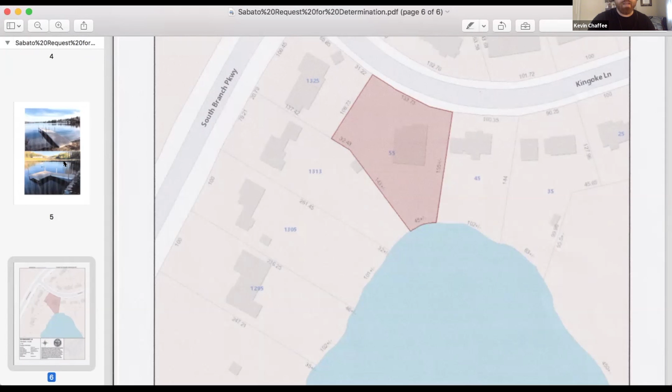Ms. Sabato doesn't have an exact dock set just yet, but she shared an example of what she was looking to do. So this is not hers, but the type that she would like, one that can be modified as such. So what I wanted to do is just open the hearing, because we have to continue regardless, but see if

there was any questions or concerns, information that the commission would like between now and the next meeting. Just if she can get us the drawing, more of a schematic for the one she's buying, I think that'd be helpful for us. Okay. I've seen a number of them. Some of them just have feet. Actually, I saw one the other day that just has a set of trailer wheels. You just back it in and then you pull it out at the end of the season. Okay.

Yep. She lives on, is that Bass Pond there? Yeah, so that's a great pond. Now does she have to get another permit, a state permit? Is Bass Pond a great pond? It's considered a great pond because people can fish in it and they can cut across your lawn. I remember that coming up when we were permitting the weed control. That's how we found out it was a great pond. Yeah, because people. Okay, well I will confirm that.

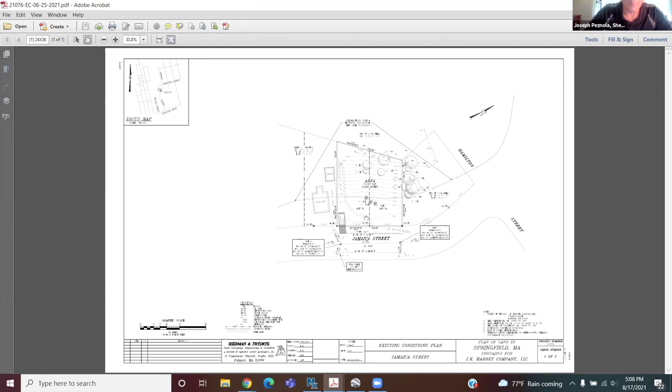So this is lots 72 and 73 Jamaica Street in Springfield. It's currently a vacant lot, 11,000 square feet, and it has a bordering vegetated wetland that runs across the back of the property. The property has only 100 feet of frontage and an average width of 110, so the entirety of the lot is within the buffer zone of the BVW.

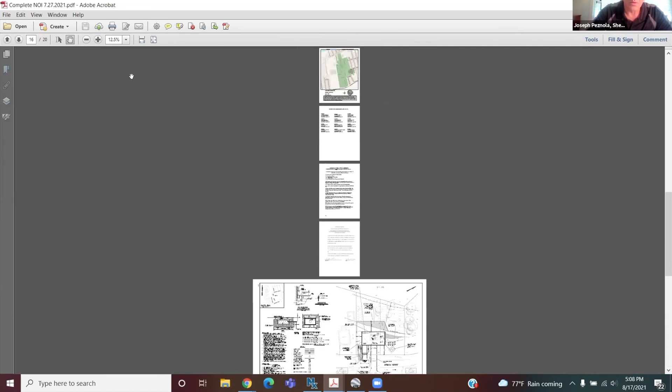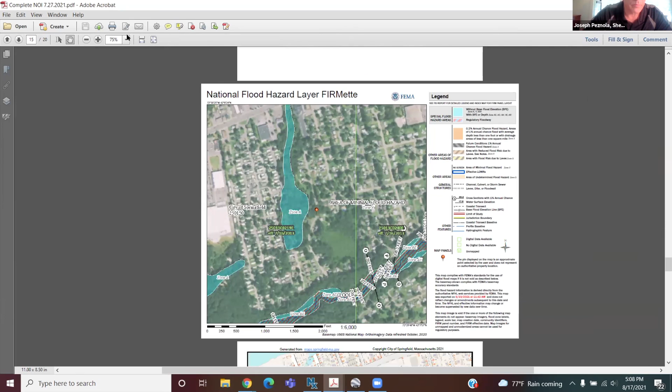We also have a floodplain bordering land subject to flooding. That is an unelevated floodplain. I can bring up the floodplain map. So it is an unelevated floodplain, a tributary to Loon Pond.

Jamaica Street is here, a little curve in it. We're right here, and there's this flood zone here that's again unelevated. When we did our survey, we graphically put it on from the floodplain FEMA maps, and it runs between the 215 and 216 contour, so we conservatively called it 216.

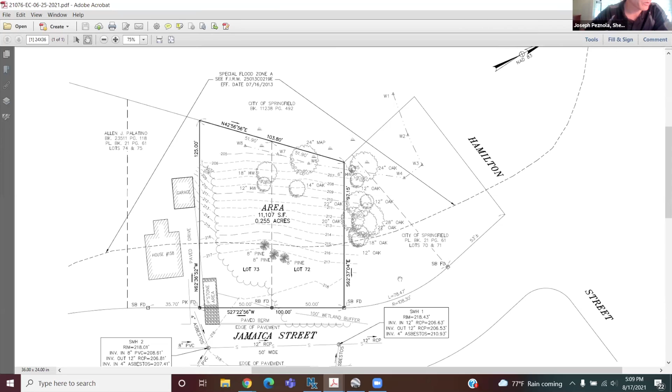There is a procedure within the FEMA guidance from the National Flood Insurance Program for approximating zone A's, and it essentially says if the graphical representation lands between contours, then you go a half a contour elevation up, so it's 216. Just to put this in context, the bottom of slope is at 205.

The expansive floodplain here from here to here is generally elevation 200 to 205, and it's 260 feet wide. So it's really, I think, a conservative call to say that we're up at 216.

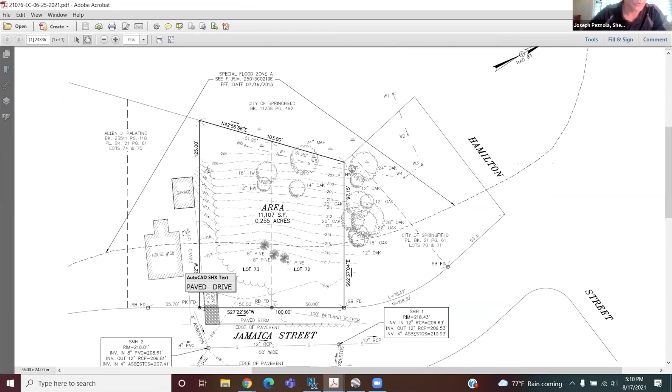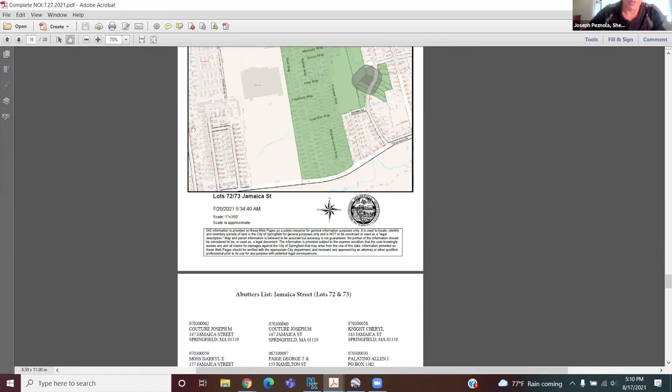For discussion purposes, the house next door has been in there since 1923. The back of the garage is at 211, front of the garage is at 214, and the house is around 216 to 217. So we think we're being quite conservative just for the purposes of establishing a BLSF without having to go through a complicated hydraulic study for the watershed, considering this is just a single family house.

So the project is a proposed single family house on the lot. We have the 50-foot wetland buffer, which in your local wetland regulations is a no-disturb zone, and we are placing the house outside of that no-disturb area. We're taking advantage of a zoning ordinance provision which allows us to put the house closer than the 25-foot setback to the street by matching the setback of the adjoining properties. So we're setting the house at 19 feet off of the street line, 11 feet off of the sideline.

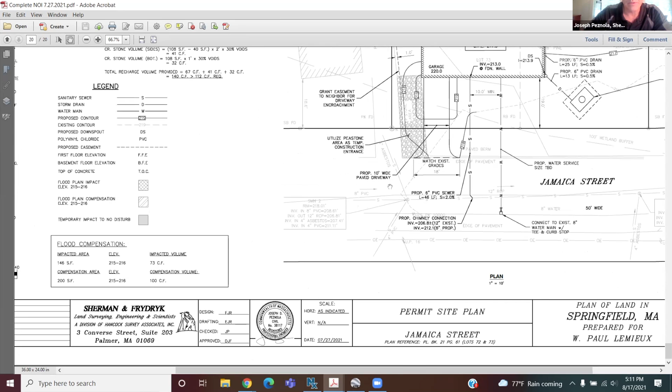We do have this floodplain impact, which is 146 square feet, 73 cubic feet from 215 to 216. We are compensating over here by cutting out the area and developing 100 cubic feet of compensatory storage for that floodplain impact.

So what we're doing inside the 50-foot buffer is we're not doing any grading. We're setting the foundation down with a walkout basement at 217, so above that 216 floodplain elevation.

We have located all of the mature trees above a 6-inch diameter DBH, and there are no trees over 6 inches in this area, just some scrub. I can show you a photograph.

So this is the house next door at 158. This is kind of the view into the lot, and it's this vegetation here that we're talking about removing. The mature trees that you see in the background and over here would all stay, and those are indicated on our survey. Some of them are actually not even on the property - they're on the abutting property that's owned by the city. But the large ones in the back would be retained.

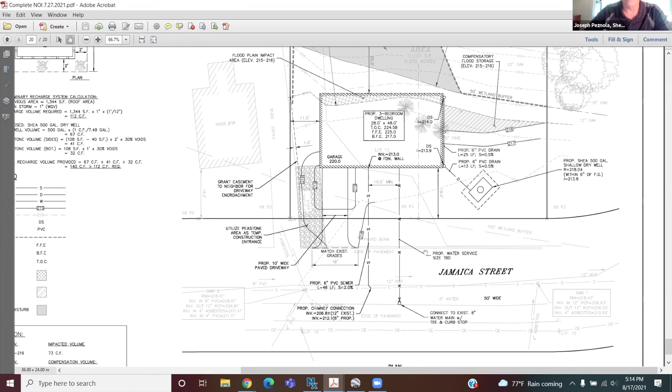Connection to city sewer and city water. Fairly straightforward, simple project, but again a very small lot that would be otherwise undevelopable. We understand your local regulations with regards to grant of variance requires that we demonstrate that there's a net benefit to the wetland.

I would contend that the vacant lot in a very old neighborhood tends to be the dumping ground for grass clippings and yard waste. Here we could develop the property, protect the wetlands, and possibly put some permanent markers at this line, and hopefully get somebody to live here that's a steward of the surrounding resources. They'd be locked into an order of conditions with perpetual conditions on maintenance and do-not-disturb requirements.

We're also happy to put something in the deed that would speak to that, and speak to the no-disturb provision, and those permanent markers. So that is the project. I'm happy to answer any questions the commission may have.

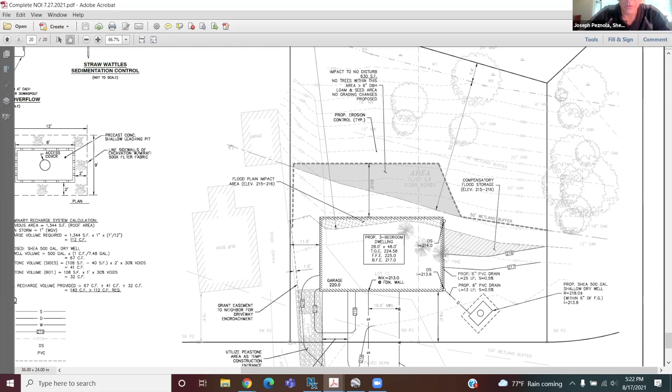So Loon Pond is a pretty nutrient-loaded pond. Establishing lawn back there, I think we'd have to put in a condition that only organic type fertilizers and lawn treatments be used, because Loon Pond has a very heavy nutrient load. Organic feeds the plants, and I'd be happy to accept that kind of condition, and I see that as a positive since it's a permanent or perpetual condition that survives the COC. Organics do, but according to what I've read, you don't get as much runoff into the pond from organics as you do from the typical chemical granular stuff they're putting out today.

A point of clarification, it may even be outside our jurisdiction or just slightly in. There's a detail on the plan that says grant easement to neighbor for driveway encroachment. That means the neighbor's driveway, after your survey, is slightly on the property you're presenting about. Yes. Okay, so it's not the opposite. Okay, I just wanted to confirm. There's an encroachment by the neighbor onto the property down in this corner.

Yeah, so that gentleman had just stopped by the office. As an abutter, he was curious about it, very curious about the whole thing. So I looked at the plan with him, because he said he saw the stake that was kind of in his driveway, which you can see on this. So I gave him the general information from the application, which is public, that he get in contact with the property owner, so he was aware these things were happening. He basically bought the property within the last year or two, it sounds like, and it was sort of news to him about the actual property boundaries. So I just wanted to put it in the record that it'd be good if the applicant could communicate with him moving forward.

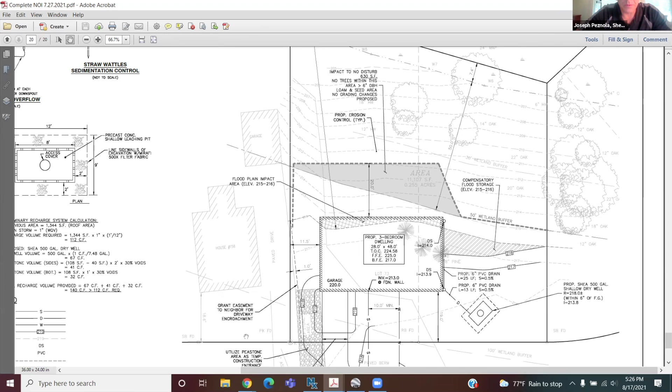Yeah, no, I totally agree that's critical. Does the commission have a preferred marker method?

I think in the past it's generally just been a cement sonotube, 4 or 5 inches, painted some obvious color. No, it doesn't have to be fluorescent orange, but just not blending in with the leaves. Understood, that would be my only concern.

From a stormwater perspective, our erosion controls are our biggest thing. You're proposing to send your roof runoff to the front into a dry well, so you're not poking a pipe out the back and creating a channel down the slope. So those would have been my big things.

I just wanted to make sure there was no work being proposed on an adjacent property, and you explained that. So at this point my current questions have been answered, and I'm fine to continue.

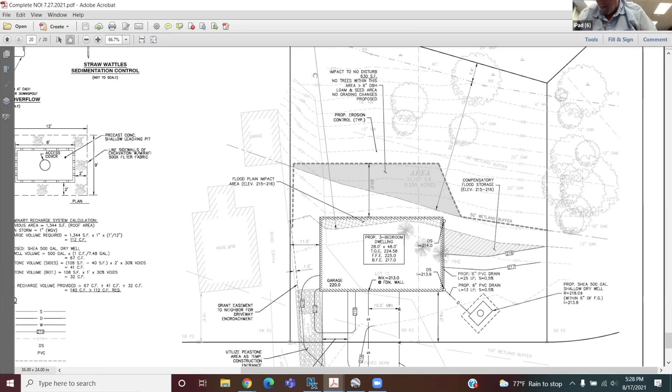Okay, I would entertain a motion to continue at the request of the applicant. Somebody want to make a motion? I'll make a motion. Go ahead. Motion to continue at the request of the applicant. Thank you, Peter. I'll second it. Thank you, Juanita.

Okay, we'll vote on that. Juanita, yes. Peter, yes. Clarence, yes. And I vote yes. Thank you.

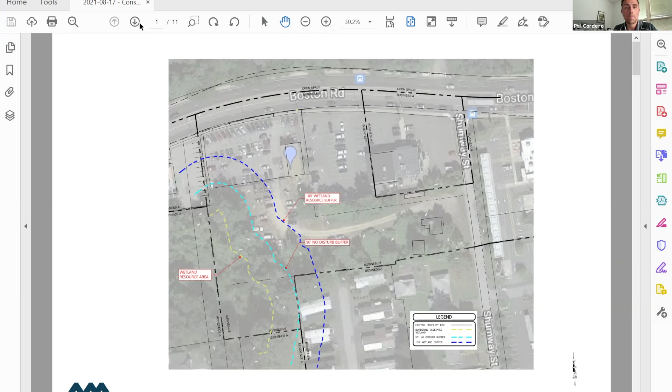Fantastic, and just confirming that you're able to see that screen, everybody? Yep, I can see it. Great. What we're proposing this evening is an application with the planning board for redevelopment of the existing property at 1021 Boston Road and 20 Shumway Street. It's a combination of 5 parcels that will be combined together, seeking redevelopment. The application is to redevelop the property to provide a 4-story self-storage building and 2 single-story self-storage units.

I think the commission is likely familiar with the nature of these properties, where you can rent a unit and store your personal belongings within the main building, climate controlled, with direct ground access to the ones below. I'm just going to bring out my highlighter. So you can see, obviously, the 4-story building is located here, self-explanatory, and then the single units are located down here. We do have wetland resources adjacent to the property, and GZA can elaborate on those further.

We have a delineated wetland resource area boundary located in the southwest corner of the property. And because of that, we have jurisdictional areas, including the 50-foot no disturb buffer, and certainly the 100-foot that develops jurisdiction. I think what I'd like to do with the commission is make sure I outline the proposal in a very clear and concise manner.

But before I describe the wetland resource areas, I think I have to bring into context the file number review letter that was issued by Mark Stinson, and I think that will help clarify the project as we move forward. The original application that we submitted to the commission identified the area back here as isolated land subject to flooding, and then it made some stray references to bordering vegetated wetland.

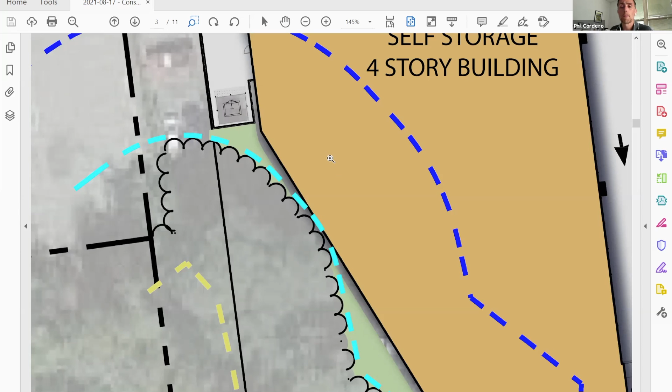I'm sorry, was there a question? No, keep going. I think someone's mic is on, apologize. Someone's voice is on, that's all.

Okay, no problem. So if I advance, I think the commission will find that very typically, we will provide, as designated on the application plans, erosion control measures installed at the 50-foot boundary. Silt fence and straw wattles will be installed. We did put forth in the application, and I'm happy to elaborate for the benefit of the commission, meeting the stormwater standards under the Wetlands Protection Act.

We will be installing a new controlling stormwater system, inclusive of deep sump and hooded catch basins, water quality devices, proprietary treatment devices, and then a subsurface recharge field to mitigate the increase in impervious area created as a result of this project. Everything will ultimately discharge through a flared end section located outside of the 50-foot no-disturb zone, equipped with a riprap flow dissipator so we don't get erosion and channeling that can occur if the area is unconfined or uncontrolled. But in total, we'll meet all the standards necessary to show this is a current, modern stormwater system.

The property, as most are aware, is currently partially developed, so the application in front of you is for a combination of redevelopment and new development. Where new development is proposed, we've met the stormwater standards, and where redevelopment is proposed, we've met them to the extent practicable—in this case, to the fullest extent. We were able to tie the redevelopment portion of the existing parking lot and existing buildings into our stormwater system, so we can present a fully compliant plan. We're not seeking any waivers or provisions for non-compliance under the 10 stormwater standards, and we meet the city code otherwise.

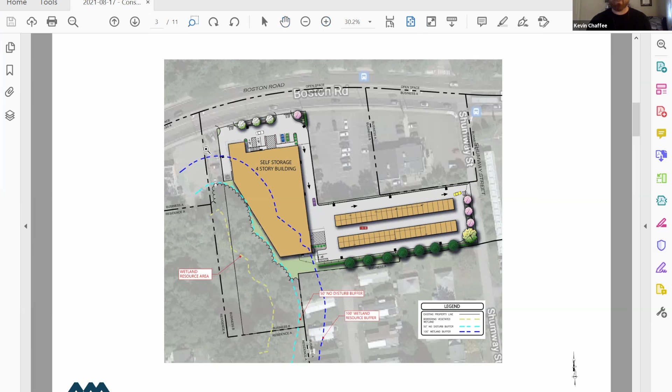Kevin, any comments or questions? My biggest thing is obviously they're fighting to keep a 50-foot buffer. My biggest review is going to be of the stormwater, so I'm going to follow up with our city engineering since they're doing a full review of the stormwater system. You presented that you're in compliance with the stormwater standards, so that'll be my focus between now and the next hearing. As long as city engineering is happy with the design and it passes the stormwater standards, I think in general I'm happy with it.

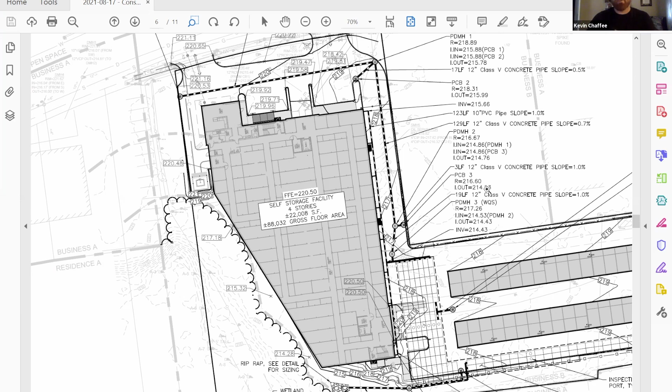I appreciate that you talked about how your development is right on the 50-foot line, so realistically you're going to have to slightly encroach during construction. We may have to work up some conditions between now and then if the commission's okay with it. If it doesn't involve major tree removal, some limited clearing can occur, but some sort of mitigation or restoration will happen following construction. At this point, I'm happy to just continue the item until our next meeting.

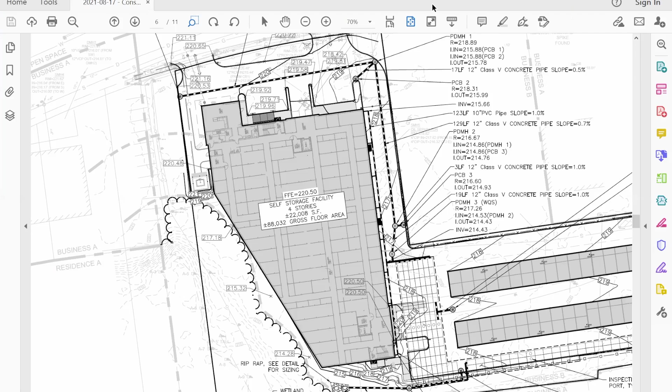I'll second it. Well, Clarence, you made it. I'll second, thank you Peter. I can't make it from the chair, so I will, okay, sorry. I will. Juanita? She said yes, she was muted but she said yes. Clarence, yes. Peter, yes. And I vote yes.